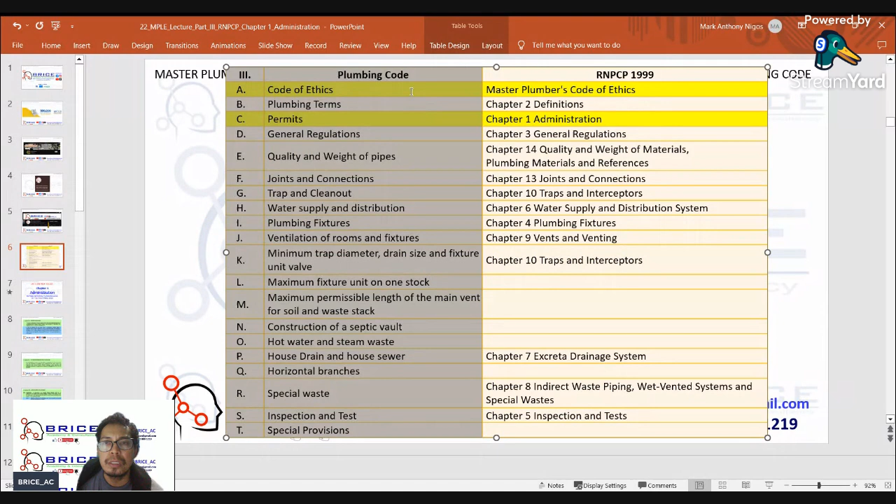Part 3 ng Master Plumber Licensure Exam. Then let us compare here. Oh sorry, written in the Revised National Plumbing Code na po yung nakalagay sa kanya. So natapos na tayo. We already finished the Code of Ethics, the Master Plumber Code of Ethics, and the basic principles.

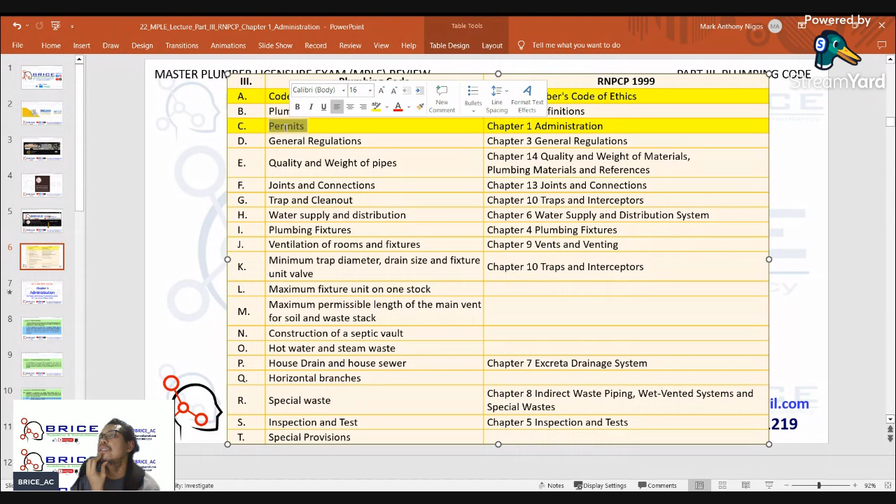And our next topic is Chapter 1 of the Code, or the Administration, which includes the permits or coverage of the plumbing code subject in the exam. Okay, yeah, Chapter 1, Administration.

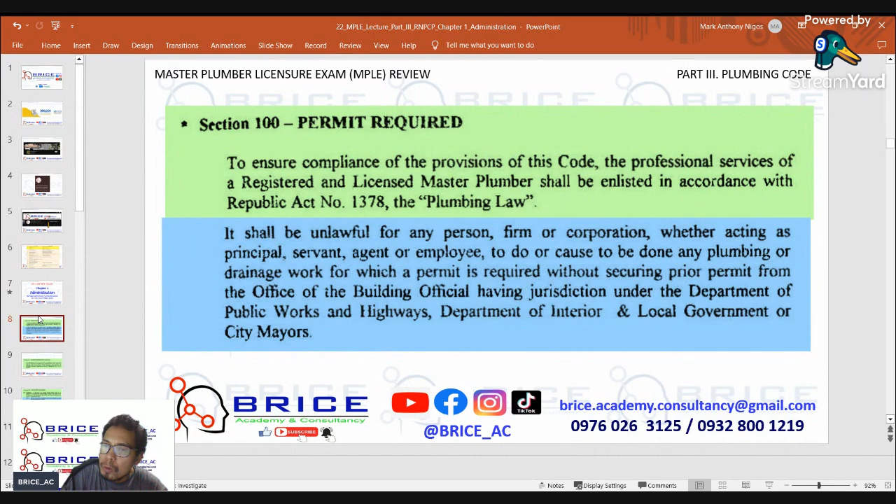To ensure compliance of the provision of this code, professional services of the registered master and licensed master plumber shall be enlisted in accordance with Republic Act No. 1378, the Plumbing Law. It shall be unlawful for any person, firm, or corporation, whether acting as principal, servant, agent, or employee, to do or cause to be done any plumbing or drainage work for which a permit is required, without securing prior permit from the office of the building official having jurisdiction under the Department of Public Works and Highways, Department of Interior and Local Government, or city mayors.

101, To whom permits may be issued. No permit shall be issued to any person, firm, or corporation to do or cause to be done any installation of plumbing work regulated by this code, except to a registered and licensed master plumber holding a valid, unexpired, and unrevoked certificate of registration as required by Republic Act 1378 as amended.

Okay, tago lang tayo, no? Wait lang, hindi tayo makatago.

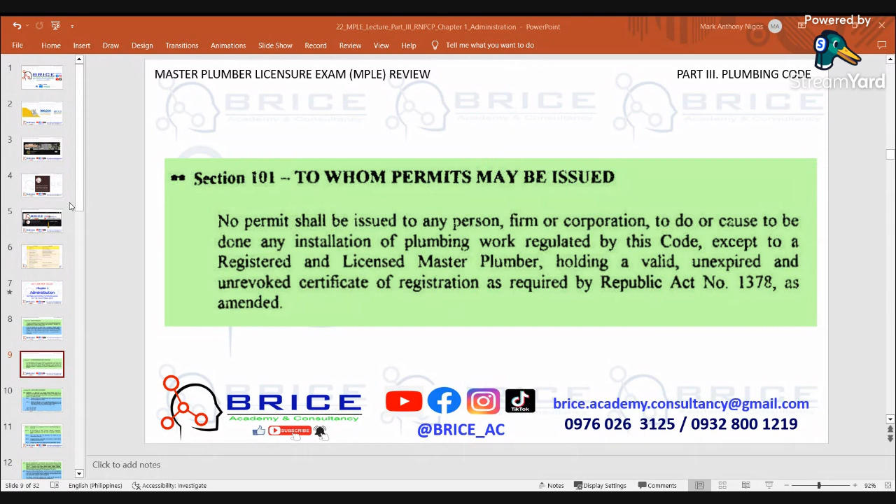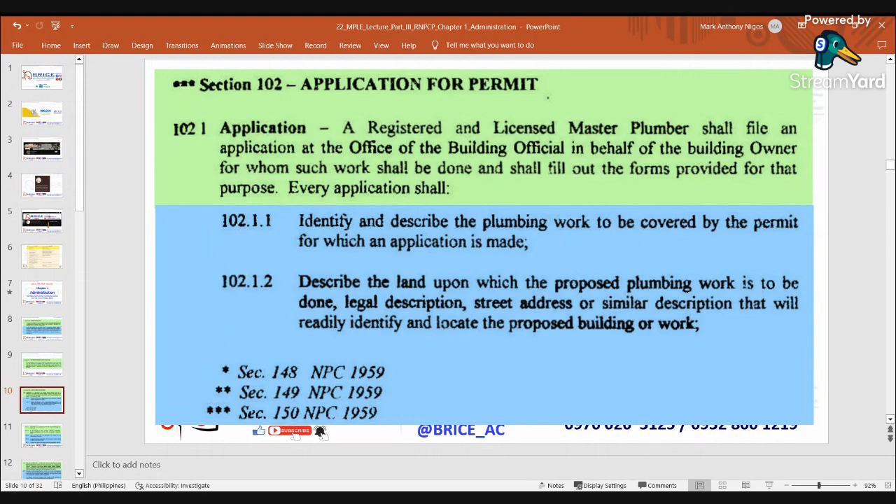102, Application for permit. A registered and licensed master plumber shall file an application at the office of the building official in behalf of the building owner for whom such work shall be done, and shall fill out the forms provided for that purpose. Every application shall identify and describe the plumbing work to be covered by the permit for which an application is made. Describe the land upon which the proposed plumbing work is to be done, legal description, street address, or similar description that will be readily identified and locate the proposed building or work. Indicate the use or occupancy for which the proposed plumbing work is intended.

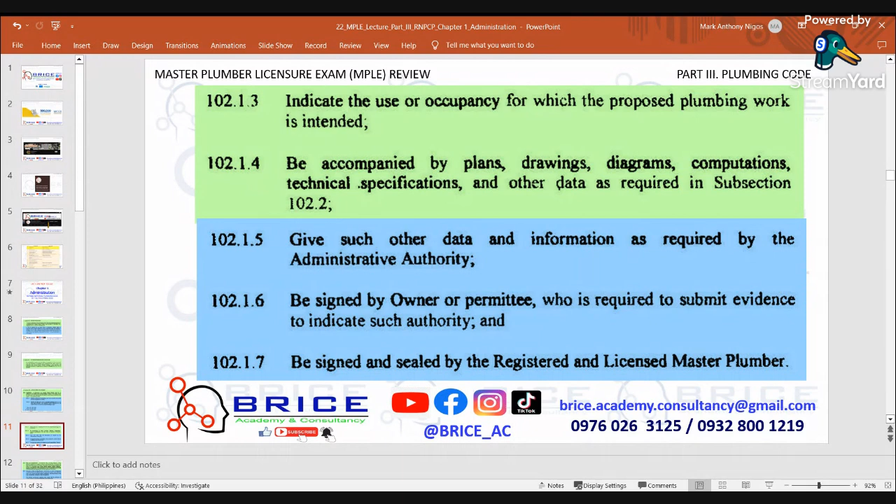Be accompanied by plans, drawings, diagrams, computations, technical specifications, and other data as required in subsection 102.2. Give such other data and information as required by the administrative authority. Be signed by the owner or permittee, who is required to submit evidence to indicate such authority, and be signed and sealed by the registered and licensed master plumber.

Plans and specifications: all plumbing plans, drawings, diagrams, design analysis, computation as required, technical specifications, bill of materials, and other required documents for all types of occupancy shall be prepared, signed, and sealed by a registered and licensed master plumber without limitation pursuant to Republic Act 1378 as amended, and shall be submitted in 6 sets of the aforementioned requirements with each application for a permit.

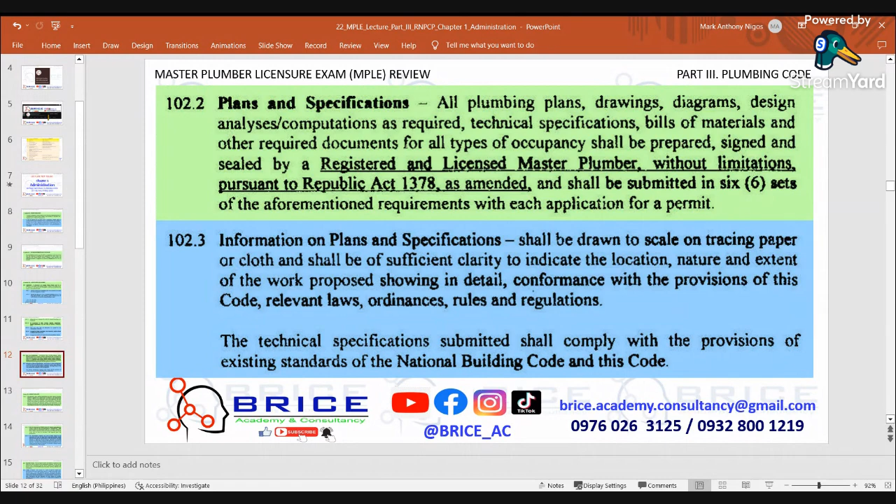Information on plans and specifications shall be drawn to scale on tracing paper or cloth, and shall be of sufficient clarity to indicate the location, nature, and extent of the work proposed, showing in detail conformance with the provisions of this code, relevant laws, ordinances, rules, and regulations. Technical specifications submitted shall comply with the provisions of existing standards of the National Building Code and this code.

103, Permit issuance. Application, plans, technical specifications, and other required documents filed, the applicant for a permit shall be reviewed by the administrative authority. Other concerned departments which verify compliance with other applicable laws may review such plans. If the administrative authority finds that the work described in the application for permit, plan specifications, and other documents filed therewith conform to the requirements of the plumbing code and other pertinent laws and ordinances, and upon payment of the fees specified in Section 105, a permit shall then be issued to the applicant.

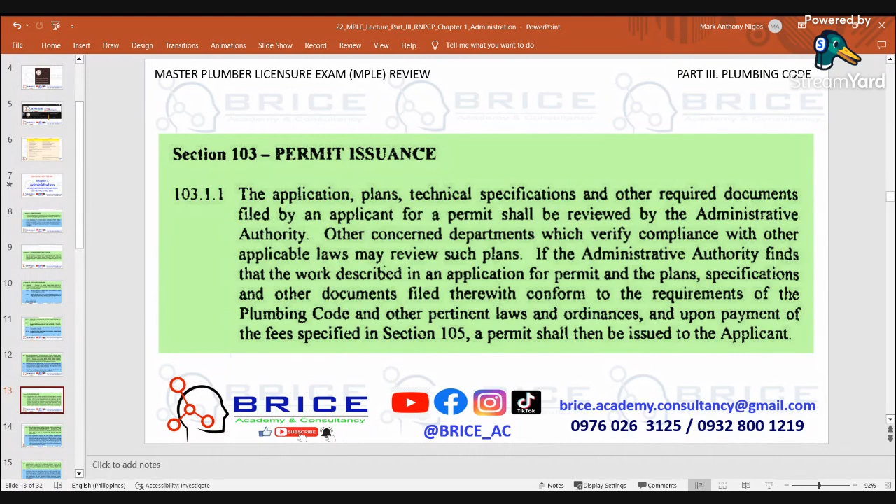When the administrative authority issues the permit, he shall endorse it in writing or stamp the plans and specifications as approved. Such approved plans and specifications shall not be changed, modified, or altered without authorization from the administrative authority, and all works shall be done in accordance with approved plans and specifications.

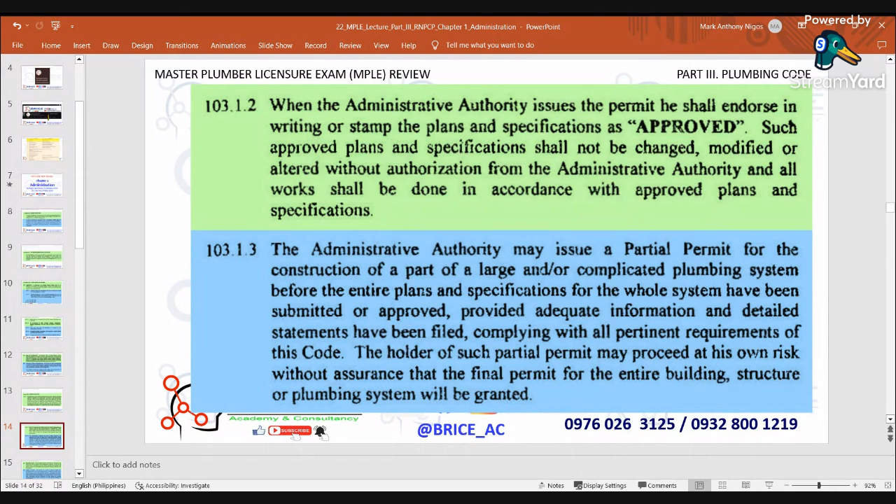The administrative authority may issue a partial permit for the construction of a part of a large and/or complicated plumbing system before the entire plans and specifications for the whole system have been submitted or approved, provided adequate information and detailed statements have been filed complying with all pertinent requirements of this code. The holder of such partial permit may proceed at his own risk without assurance that the final permit for the entire building, structure, or plumbing system will be granted.

Retention of plans. One set of approved plans, specifications, computations and related data shall be retained by the administrative authority. Two sets of approved plans, specifications, and data shall be returned to the applicant and owner, one set of which shall be kept at the job site at all times while the work is in progress.

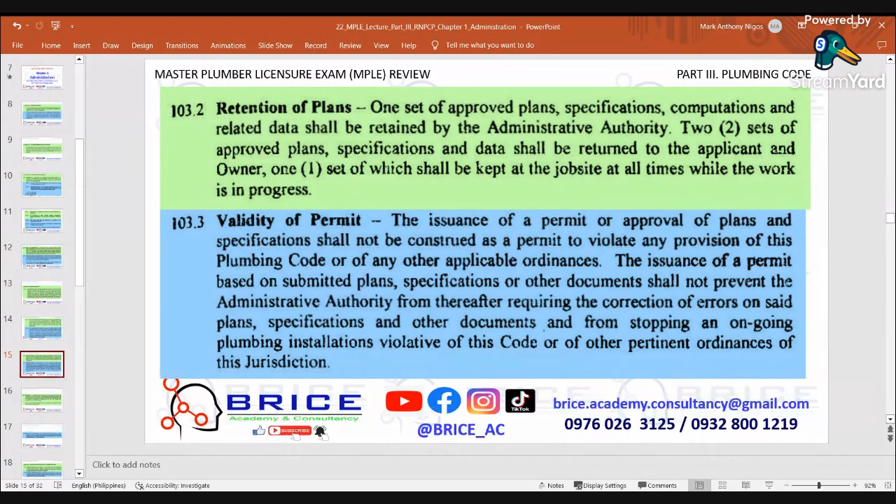Validity of permit. Issuance of a permit or approval of plans and specifications shall not be construed as a permit to violate any provisions of this plumbing code or of any other applicable ordinances. Issuance of a permit based on submitted plans, specifications, or other documents shall not prevent the administrative authority from thereafter requiring the correction of errors on said plans, specifications, and other documents, and from stopping any ongoing plumbing installations violative of this code or of other pertinent ordinances of this jurisdiction.

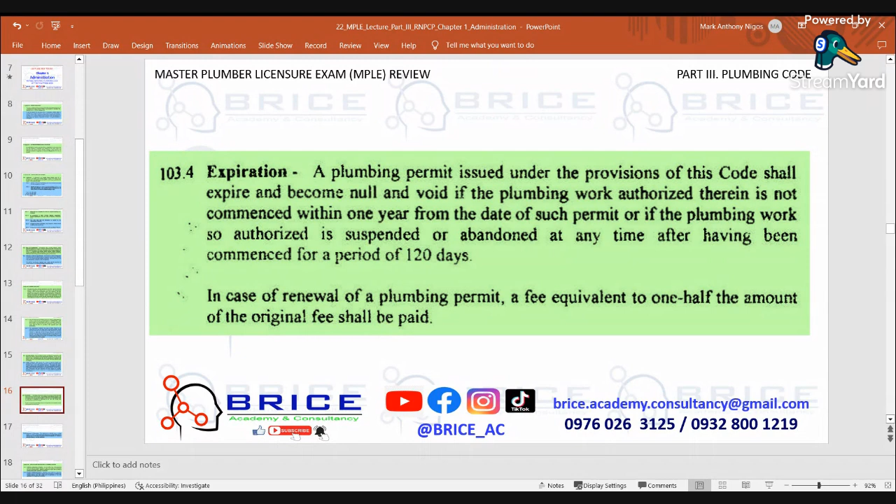Expiration. A plumbing permit issued under the provision of this code shall expire and become null and void if the plumbing work authorized therein is not commenced within one year from the date of such permit, or if the plumbing work so authorized is suspended or abandoned any time after having been commenced for a period of 120 days. In case of renewal of a plumbing permit, a fee equivalent to one-half the amount of the original permit fee shall be paid.

Suspension or revocation. The administrative authority may, in writing, suspend or revoke a permit issued under the provision of this code whenever issued in error or on the basis of incorrect information supplied, or in violation of pertinent ordinances, rules, and regulations. Section 104, application for existing plumbing system.

Additions, alterations, or repair may be made to any existing plumbing system provided the addition, alteration, or repair works conform to the requirements for a new plumbing system. Additions, alterations, or repair shall not render an existing system unsafe, unsanitary, or overloaded.

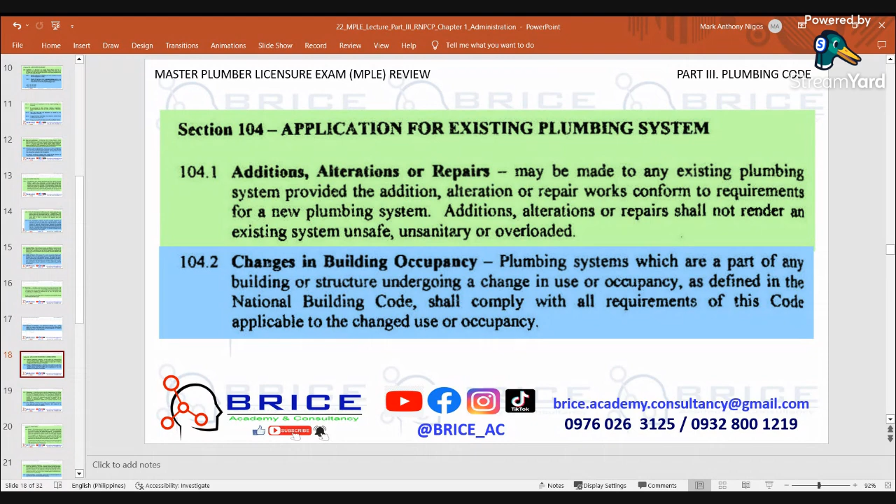Changes in building occupancy. Plumbing systems which are a part of any building or structure undergoing a change in use or occupancy as defined in the National Building Code shall comply with all requirements of this code applicable to the change of use or occupancy.

Maintenance. All plumbing systems, materials, and appurtenances, both existing and new, and all parts thereof shall be maintained in proper operating condition. All devices or safeguards required by this code shall be maintained in conformance with the code existing at the time of installation.

At the time the plumbing system was installed, the owner or his designated agent shall be responsible for the maintenance of plumbing systems. To determine compliance with this subsection, the administrative authority may cause the reinspection of any plumbing system. Moved buildings.

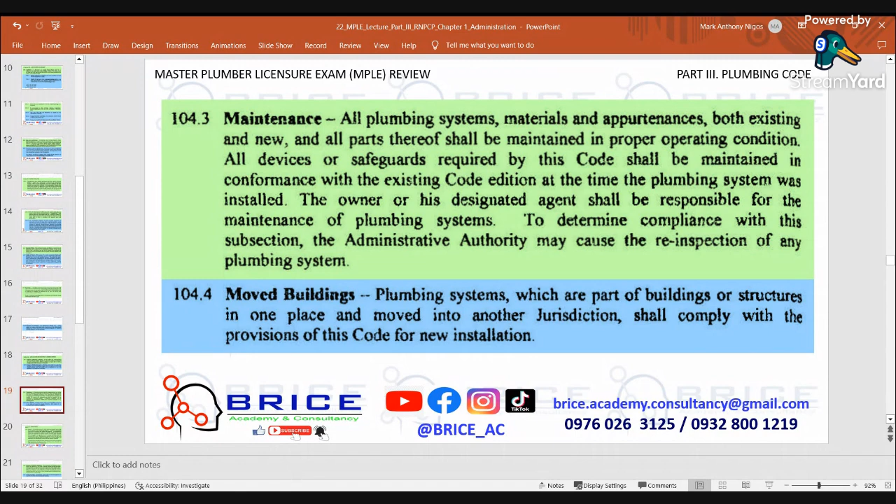Plumbing systems which are part of buildings or structures moved from one place into another jurisdiction shall comply with provisions of this code for new installations.

Section 105, Inspection. General. All plumbing systems for which permits are required by this code shall be inspected by the administrative authority. No portion of any plumbing system shall be concealed until inspected and approved. The administrative authority or his representative shall not be liable for expenses incurred in the removal and replacement of materials required to warrant proper inspection.

When the installation of a plumbing system is complete, an additional and final inspection shall be made. Plumbing systems regulated by this code shall not be connected to the water and energy fuel supplies nor to the sewer system until authorized by the administrative authority and other agency concerned.

All administrative plumbing personnel, plumbing inspector, shall be a registered and licensed master plumber in accordance with the provisions of Republic Act 1378, otherwise known as the Plumbing Law.

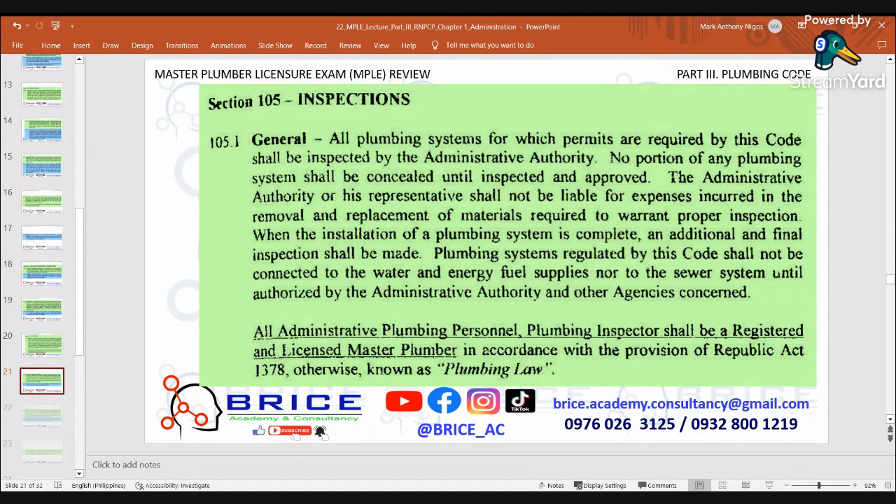Operation of plumbing equipment. Requirements of this section do not prohibit the operation or use of any plumbing accessory installed to replace existing equipment or fixtures serving an occupied portion of the building when a request for inspection of such equipment or fixtures has been filed with the administrative authority not more than 48 hours after such replacement is completed and before any portion of such plumbing system is concealed by any permanent portion of the building.

Testing of systems. All plumbing systems shall be tested and approved as required by this code or the administrative authority.

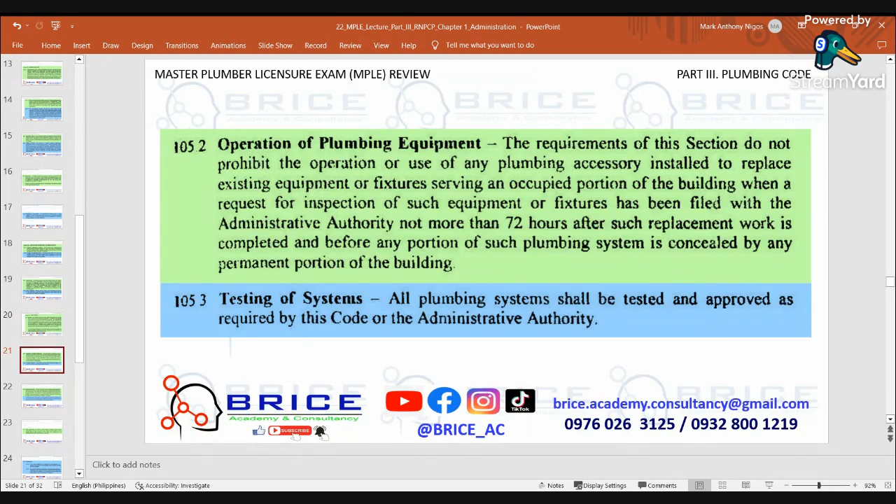Inspection and inspection requests shall be the duty of the person doing the plumbing work authorized by a permit to notify the administrative authority that such work is ready for inspection.

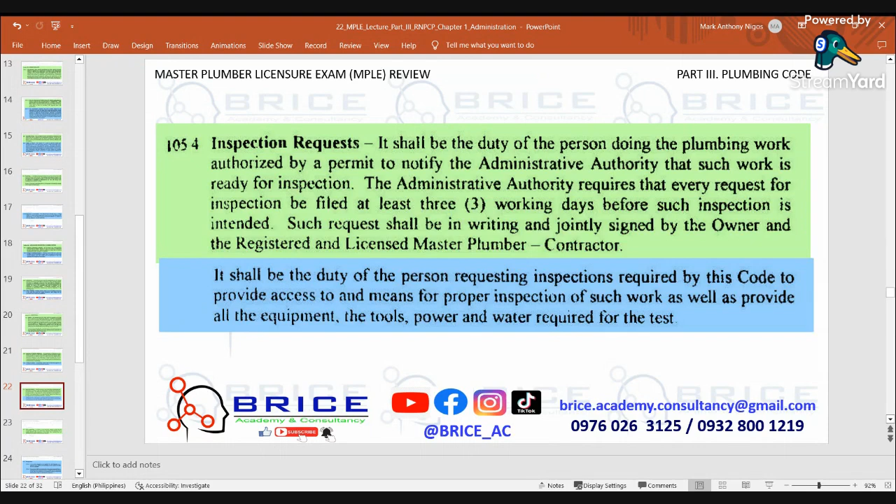The administrative authority requires that every request for inspection be filed at least 3 working days before such inspection is intended. Such request shall be in writing and jointly signed by the owner and the registered and licensed master plumber or contractor. It shall be the duty of the person requesting inspection required by this code to provide access to and means for proper inspection of such work, as well as provide all equipment, tools, power, and water required for the test.

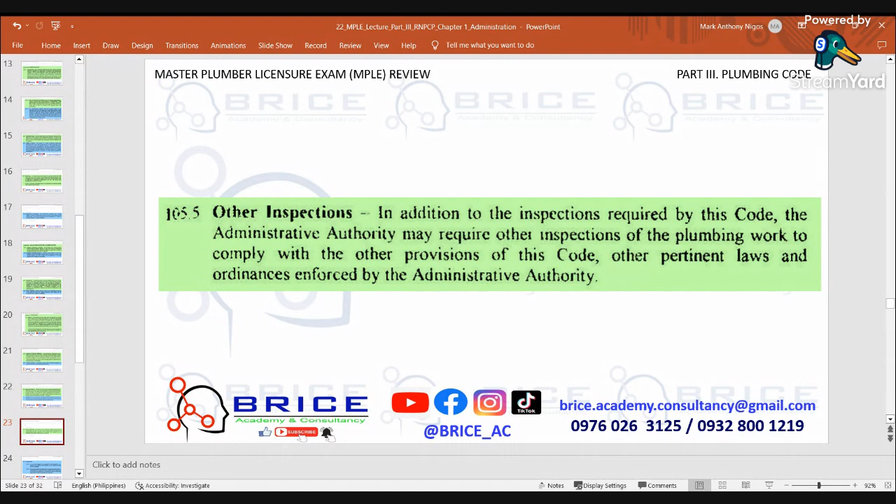Other inspections: in addition to the inspections required in this code, the administrative authority may require other inspections of the plumbing work to comply with other provisions of this code and other pertinent laws and ordinances enforced by the administrative authority.

Re-inspection: a fee will be charged on the applicant for each re-inspection or inspection when a portion of the plumbing work called for is not completed. This provision shall not be interpreted as requiring a re-inspection fee for the first time a job is rejected or fails to comply with the requirements of this code, but as a deterrent on the practice of calling for inspection before the job is ready for inspection or re-inspection.

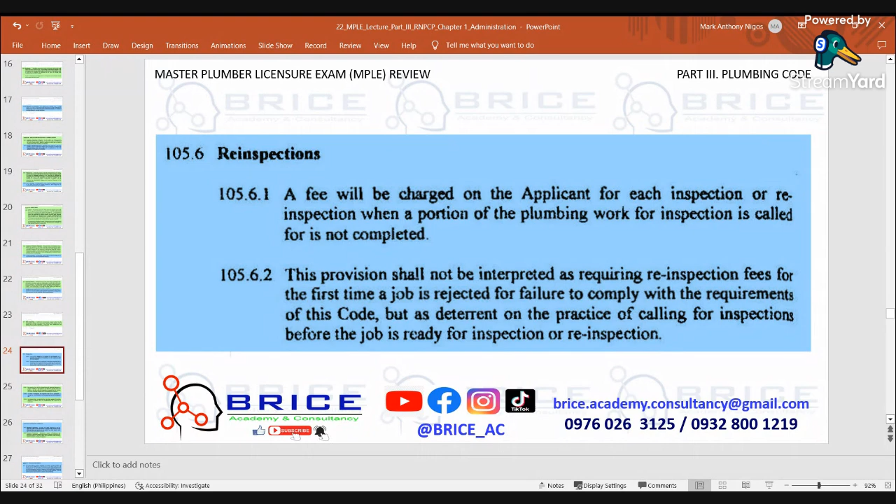Re-inspection fees shall be charged when the approved plans are not readily available to the inspector, for failure to provide access and facility on the date the inspection is requested, or for deviating from plans requiring the approval of the administrative authority.

To obtain re-inspection, the applicant shall file an application in writing on a form furnished for that purpose and pay the reinspection fee. In instances where re-inspection fees have been assessed but payment of required fees is pending, no reinspection of the work will be performed.

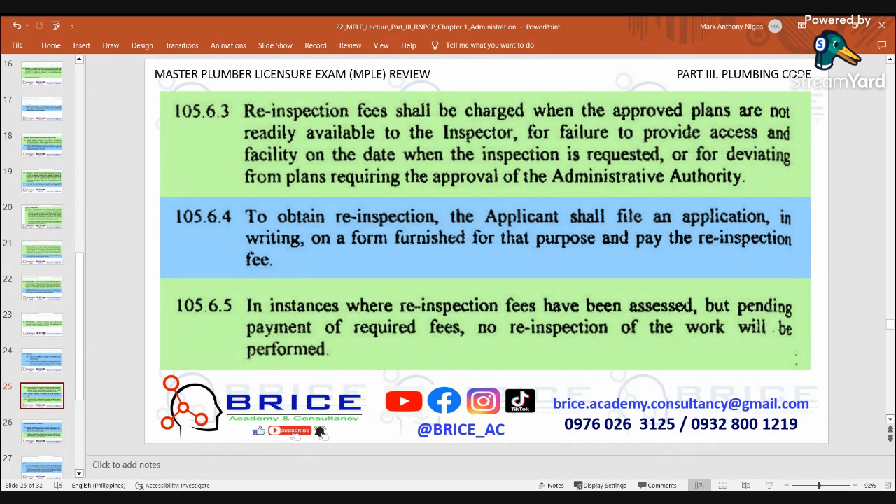Section 106, Connection Approval, Permanent Connections. No person shall install connections to any water supply line, sewer, or storm drain systems as required by this code, and for which other applications and permits are also required from other agencies, before approval by the administrative authority.

Temporary connections: the administrative authority will endorse to other authorities or government agencies the issuance of temporary connections of the plumbing equipment to the water supply main, sewer main, power line, and gas main for the purpose of testing the equipment.

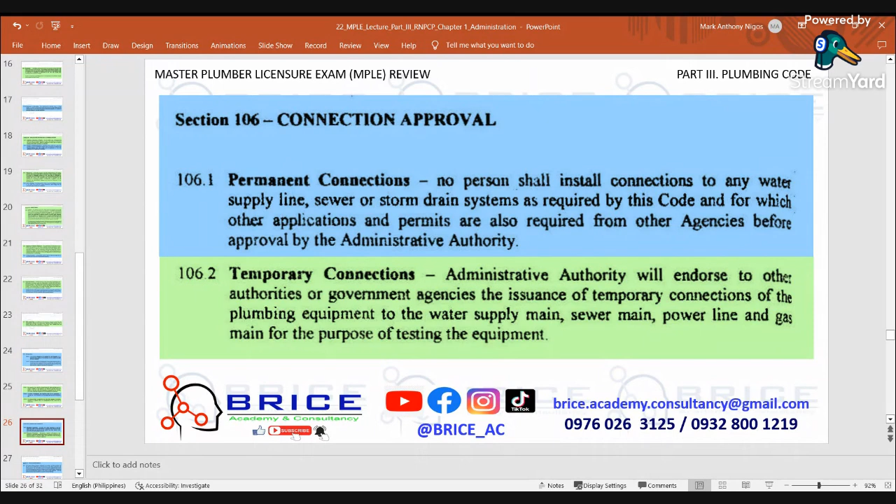Section 107, Special Provisions. All licensed master plumbers registered in accordance with the provisions of Republic Act number 1378 shall secure for themselves a seal of the standard size and type as required. The same shall be used on all plumbing applications for permits and all plumbing plans prepared by registered and licensed master plumbers, as well as on all documents required in the practice of their profession.

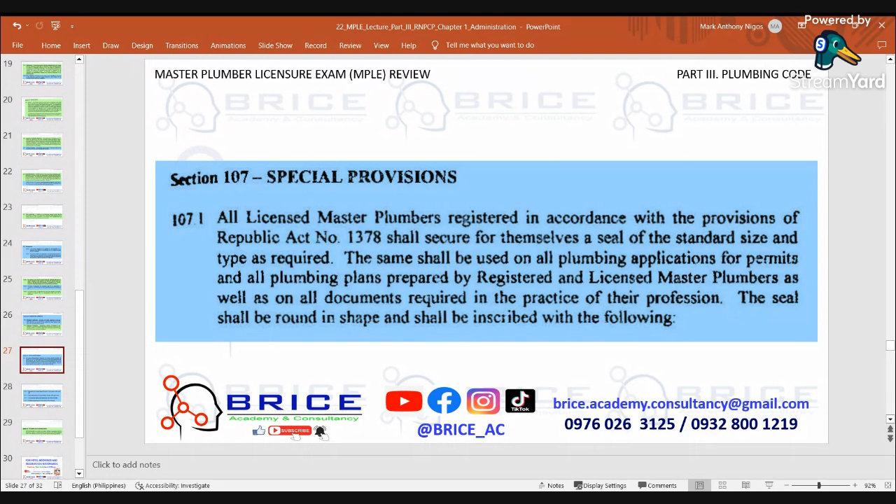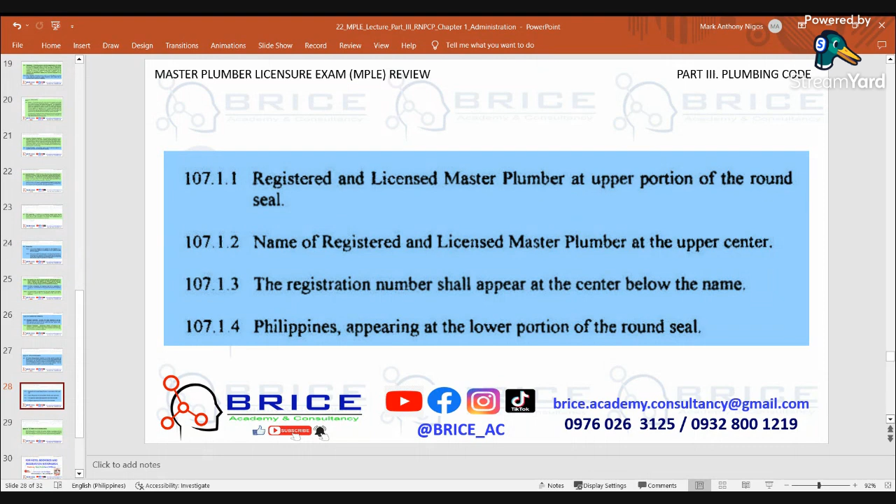The seal shall be round in shape and shall be inscribed with the following: registered and licensed master plumber at the upper portion of the round seal, name of the registered and licensed master plumber at the upper center, registration number at the center below the name, and Philippines appearing at the lower portion of the round seal.

Section 108, Plumbing fixtures required. Each building shall be provided with sanitary facilities in accordance with best practice for mobility of disabled persons as provided in the National Building Code of the Philippines or by other government departments having jurisdiction.